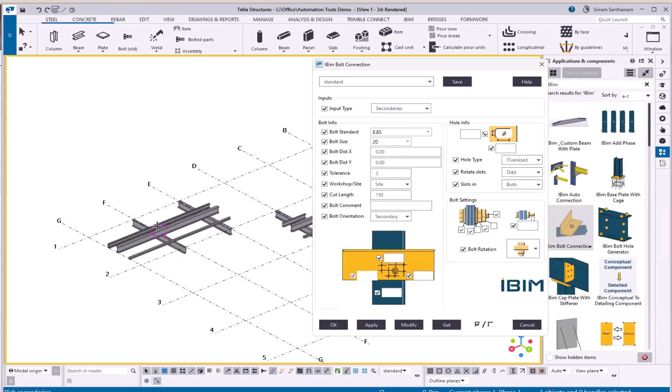I'm going to pick all these members as secondaries. Once I press the middle mouse, it will automatically create the bolt between two parts. And it is just a matter of opening the application and changing the settings.

And here the primary member is a UB section and the secondary is an angle. So let me just select the component and change the settings.

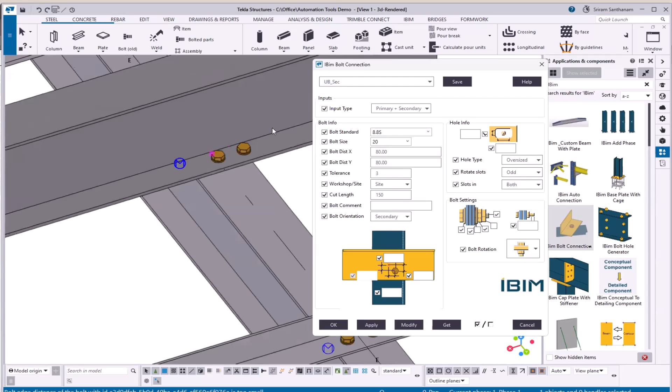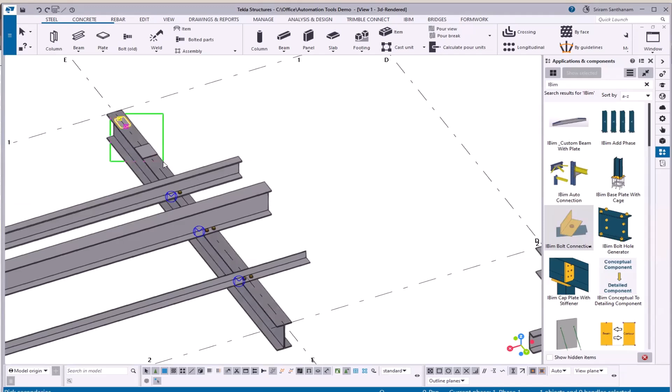And this is the contour plate and this is the beam plate. Now I'm going to pick these two plates and press the middle mouse and then open the application, changing the settings.

And this is the PFC member. I'm going to apply bolts between the plates and the PFC section.

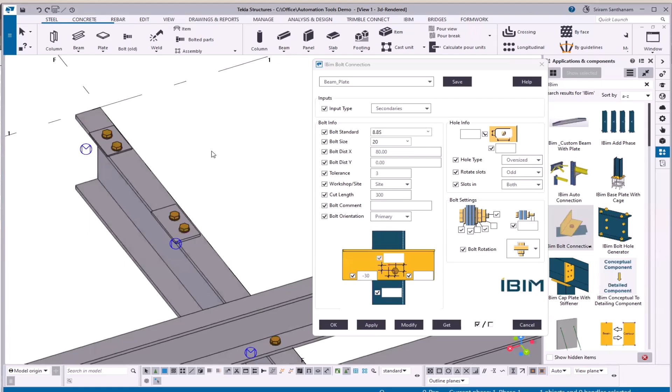If you want to pick the primary and secondary member, then change the input type. Pick the primary and pick the secondary. Select the component and change the settings.

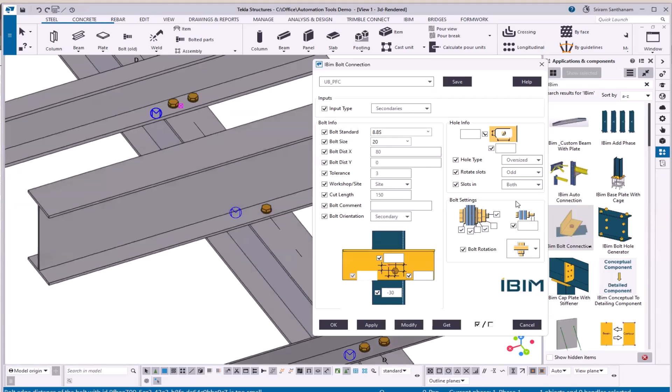If you want to create a slotted hole instead of a bolt, pick off this box and there you can see the slotted hole.

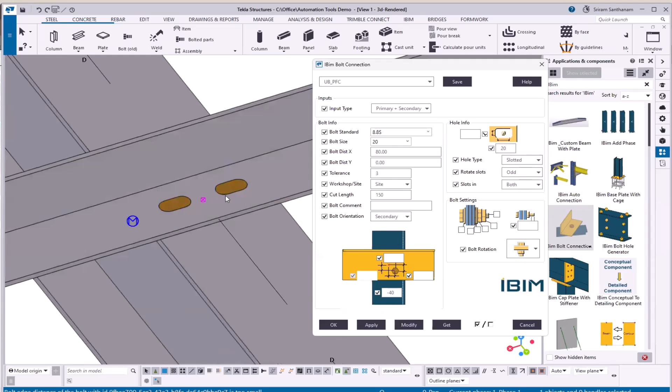As you can see, it's easy to create bolts between two parts using this application. There is no doubt this is going to save you a lot of time because you can pick multiple secondaries and then create bolts between two parts.